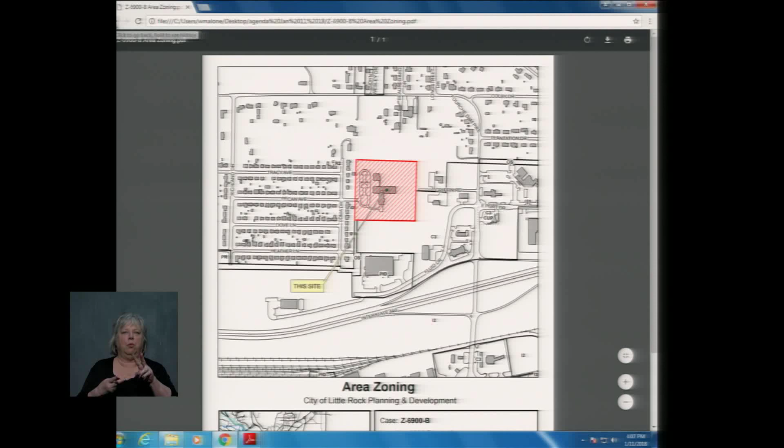The applicant has not responded to comments raised at the November 1st, 2017 Subdivision Committee meeting. Staff recommends deferral of these items to the February 22nd, 2018 public hearing. Item number 6, file number S-1805, Little Rock Tours Subdivision Site Plan Review, located at 3100 Interstate 30.

The applicant submitted a request dated January 8th, 2018, requesting a deferral of this item to the February 22nd public hearing to allow the developers time to meet with the adjoining neighborhood. The deferral request will require a waiver of the Commission's bylaws with regard to the late deferral request. Staff is supportive of the deferral request.

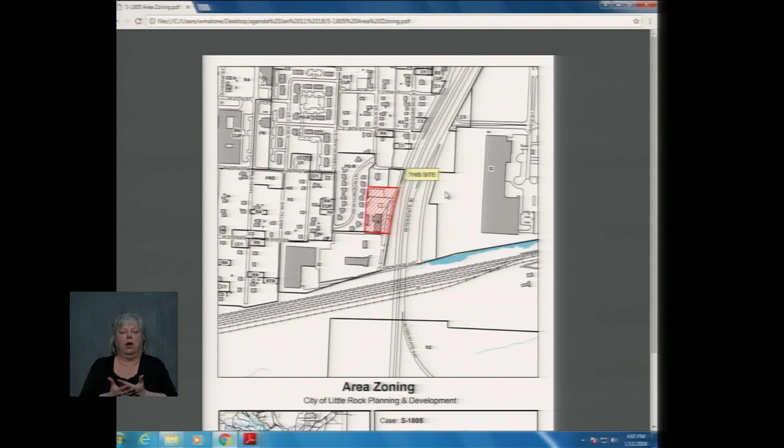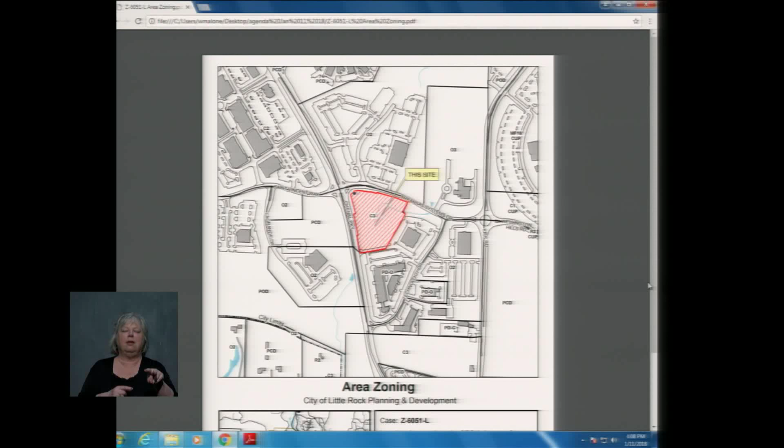Item number 8, file number Z-6051-L, Shops at Chenal, long form PCD, located on the southeast corner of Arkansas Systems Drive and Chenal Parkway. The applicant submitted a request dated January 2nd, 2018, requesting deferral of this item to the February 22nd, 2018 public hearing. Staff is supportive of the deferral request.

Item number 12, file number Z-9284, Sticks Bar and Grill, short form PCD, located at 3910 Asher Avenue. The applicant failed to provide staff with the requested parking and circulation plan and the parking agreements with the adjoining property owners. Staff recommends deferral of this item to the February 22nd, 2018 public hearing.

Item number 13, file number Z-9285, Brown, short form PDC, located at 9203 Hilaro Springs Road. Based on conversations with the applicant concerning the proposed use of the property, staff recommends deferral of this item to the February 22nd, 2018 public hearing.

Items for consent approval. Item number 1, file number S-47-N, Parkway Place Tract D, replat, located at 14100 Parkside Drive. Staff recommends approval of the request, subject to compliance with the comments and conditions as outlined in paragraphs D, E, and F of the agenda staff report.

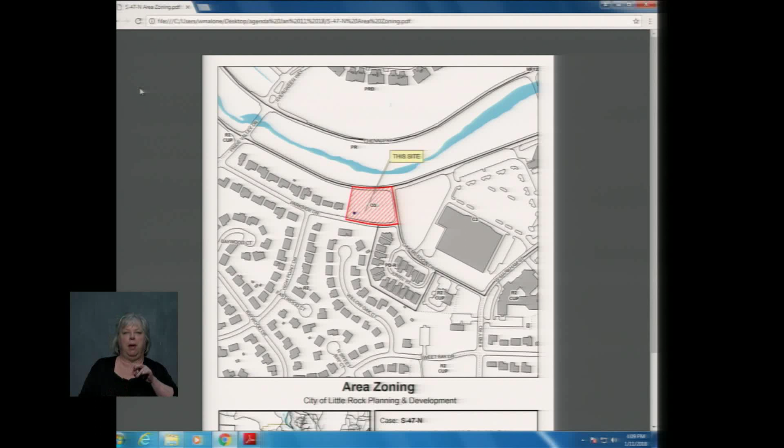Staff recommends approval of the variance request from the master street plan to allow Parkside Drive to be classified as a local street. Item number 2, file number S-224-E, Westover Hills Subdivision replat, lots 77 and 78R, located at 6701 and 6705 Hawthorne Streets. Staff recommends approval of the request, subject to compliance with the comments and conditions as outlined in paragraphs D, E, and F of the agenda staff report.

Staff recommends approval of the variance request to allow reduced side yard setback for lot 78R.

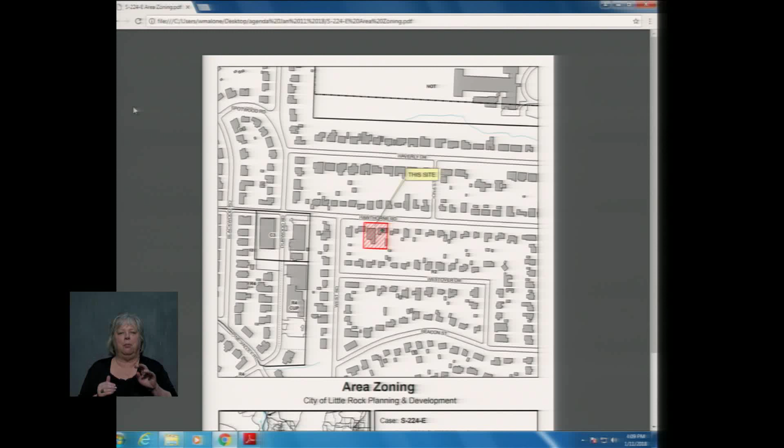Item number 3, file number S-867-R, Chenal Valley Phase 33 preliminary plat, located east of Lamarche Drive and west of Rahling Road, accessed from Lamarche Drive and Chenal Heights Drive.

The applicant has addressed staff's concerns related to sight distance, has redesigned the street to intersect with Masons Boulevard, and has provided staff with a sketch grading and drainage plan. The applicant has also indicated traffic calming measures along Foulstone Drive.

The request includes a variance from section 29-190 to exceed a 3-to-1 maximum slope requirement. The applicant proposes, based upon a geotechnical analysis and report, to fill to a 2-to-1 slope. Based on the information provided, staff is in full support of the applicant's request.

Staff recommends approval of the request, subject to compliance with the comments and conditions as outlined in paragraphs D, E, and F of the agenda staff report.

Staff recommends approval of the variance request to allow reduced front and side yard setbacks. Staff also recommends approval of the variance request from the city's land alteration ordinance to allow grading of future phases and the lots with the extension of the infrastructure, and the variance request from section 29-190.

Item number 4, file number S-867-S, Chenal Valley Phase 32 preliminary plat, located on the east side of Lamarche Drive across from Lamarche Boulevard.

The applicant submitted a sketch grading and drainage plan and a letter certifying the sight distance for the new street at the intersection of Lamarche Drive. The request includes a variance from section 29-190 to exceed the 3-to-1 maximum slope requirements.

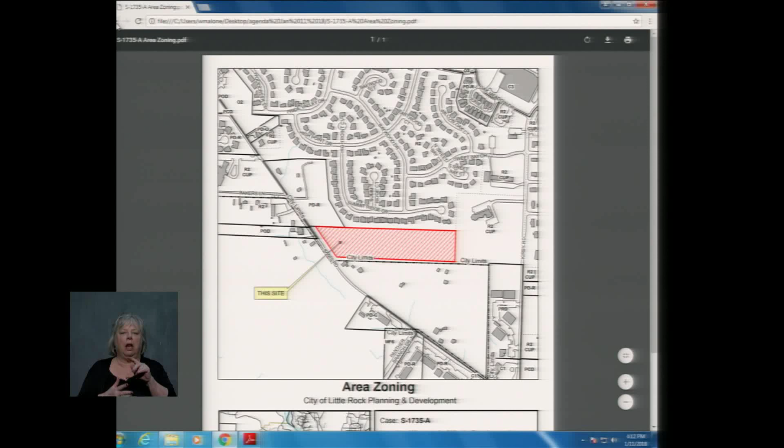A variance from section 31-232 to allow the creation of lots with a lot width less than the 60-foot typical required per the R2 single-family zoning district, and to allow 5-foot side yard setbacks on all lots within the subdivision. Item number 7, file number Z-8741-A, Ace General Contractors, short form PDC, located at 10819 Stagecoach Road.

Item number 7, file number Z-8741-A, Ace General Contractors, short form PDC, located at 10819 Stagecoach Road.

Staff recommends approval of the request to add medical office and general and professional office uses as allowable uses for the site as proposed by the applicant.

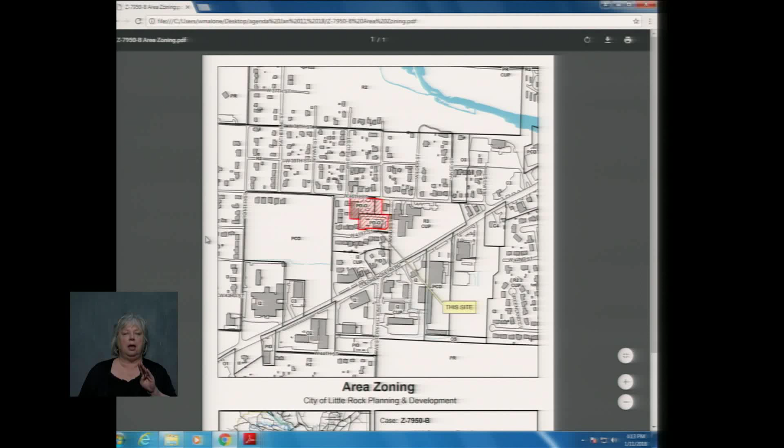Item number 9, file number Z-7950-B, Pollock Realty, revised short form PDO, located at 4016 Stannus Road.

Staff recommends approval of the request, subject to compliance with the comments and conditions as outlined in paragraphs D, E, and F of the agenda staff report.

Staff recommends approval of the variance request from Section 30-43 and 31-210 to allow the drive on West 40th Street nearer the property line than typically allowed. All gate locations will have to be approved by staff.

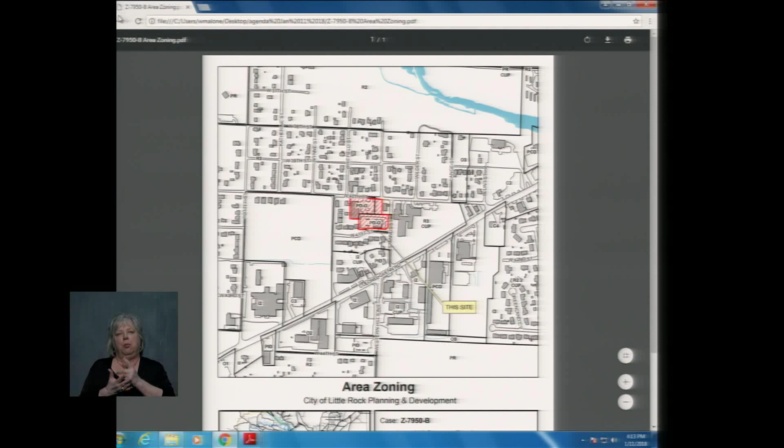Item number 10, file number Z-9078-A, Central Arkansas Urgent Care Short Form PID revocation, located in the 7400 block of Lindsay Road.

Staff recommends the current PID zoning classification be revoked and the previously held I-2 Light Industrial Zoning District be restored.

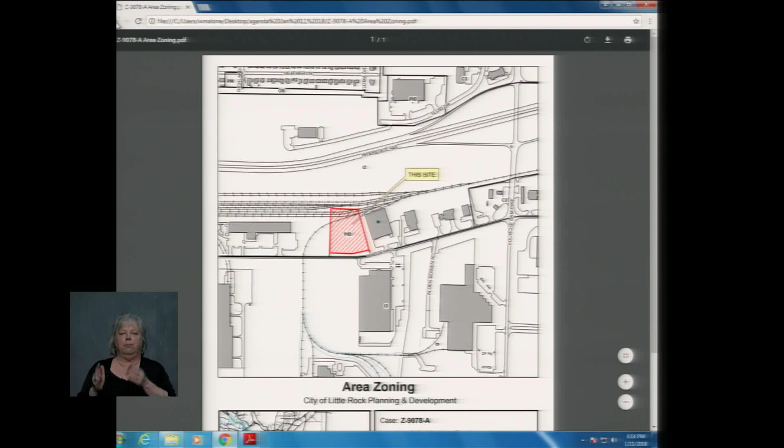Item number 11, file number Z-8751-A, Mosaic Church of Little Rock, revised long form PCD, located at 6221 Colonel Glen Road.

Staff recommends approval of the request, subject to compliance with the comments and conditions as outlined in paragraphs D, E, and F of the agenda staff report.

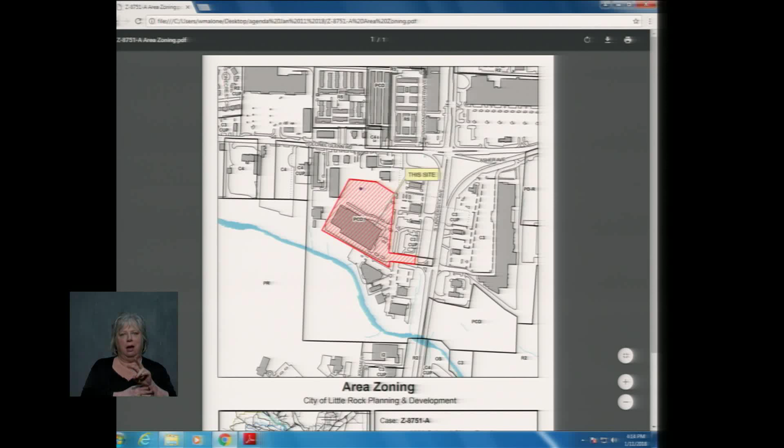Item number 15, file number Z-9287, AEDD short form PDC, located at 105 East Roosevelt Road.

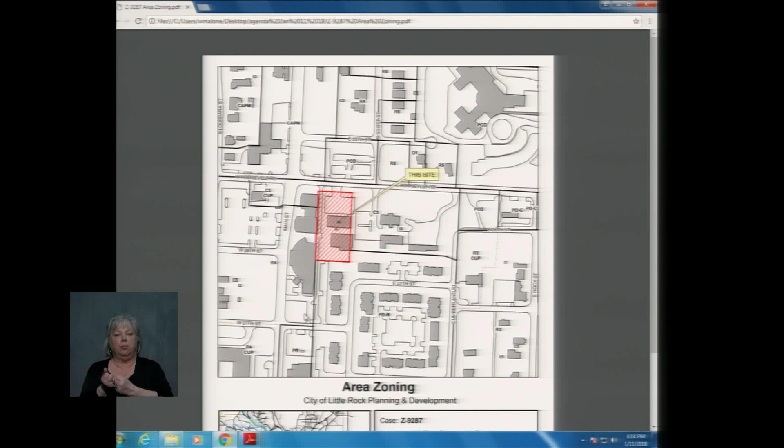Staff recommends approval of the request, subject to compliance with the comments and conditions as outlined in paragraphs D, E, and F of the agenda staff report.

Item number 16, file number Z-4451-F, 71 Hunters Green Circle, revised short form PDR, located at 71 Hunters Green Circle.

Staff recommends approval of the request to allow the placement of the proposed sunroom within the rear yard setback. And that concludes the consent agenda.

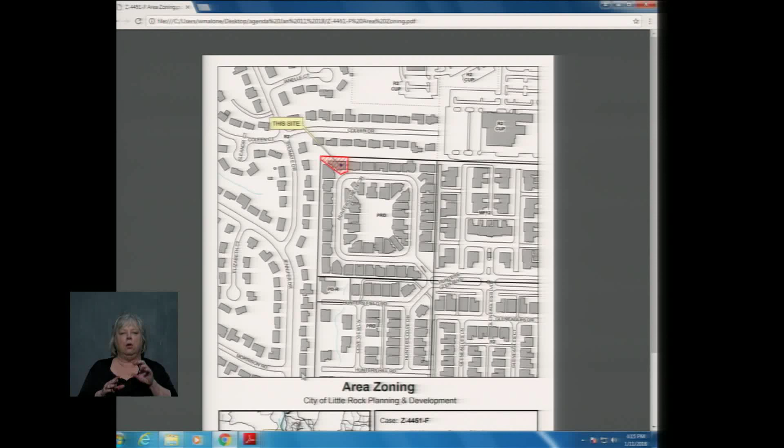Thank you, Donna. Do we have any motions, please? First, the first one will be bylaw waiver, yes.

Mr. Chairman, I make a motion that we adopt a bylaw waiver for item 6S-1805 Little Rock Tours. There's a motion for waiving the bylaws to defer that item. Do I hear a second, please? I'll second. We have a motion to defer that item to February 26th. Those in favor of the bylaw waiver, raise your hand.

Those opposed? Okay, do I hear a motion for the consent agenda, please? Mr. Chairman, I move that we approve the consent agenda, including all staff comments and conditions therein. We had a motion for the consent agenda to be approved. Do I hear a second? Second. We have a motion and a second for the consent agenda.

Those approve the consent agenda, raise your hand, please. Those opposed? If you were applicant and your item was read by Donna, that was on the consent agenda, that means you're excused. Your item was approved to move forward.

While they're transitioning out, I want to remind the folks here for item C, which is the one on Bowman, there's a limit to 20 minutes for each side, though I don't think this will be an issue. So those in opposition to that item, if you have a speaker you want to speak first or speak most, feel free to offer him or her up. I only have 3 cards for item C, so I think 20 minutes will be adequate for that.

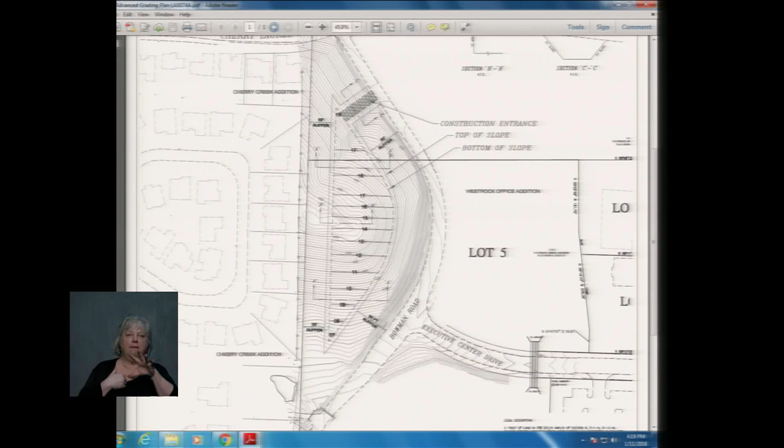Excuse me, I've lost my place. The revised plan shows an 80-foot undisturbed buffer to be maintained adjacent to Bowman Road, except for construction access. It also shows an undisturbed buffer to be maintained against the subdivision to the west of 50 feet, except for a construction entrance to haul dirt.

The plan up there represents where the contours are in the middle of that bow-shaped donut hole where dirt would be removed, and construction access would be to the north through the hatched area. They would maintain some of the trees and some of the earthwork along Bowman and along that subdivision. This is a temporary grading plan, in that someday somebody is going to relocate Bowman Road, but this is how it will temporarily look in the interim.

And that will also create some terraces on the interior of that excavation. Because those terraces are more than 10 feet tall between a 10-foot bench, they're proposed at 15 foot, that creates the second variance that you see in your write-up.

With staff's recommendation for approval, we have a number of conditions associated with it: that these buffers be maintained as required in the ordinance, that they restore the site with suitable vegetation such as hydroseeding, that a geotechnical analysis be done to make sure what they're doing is stable and won't fall in or cause any problems to anybody else in the area, and that it'll be stable for a long time afterward. There are other conditions associated with the issuance of that excavation permit that are outlined in the packet and in the ordinance. And with that, I think I've introduced that one well enough.

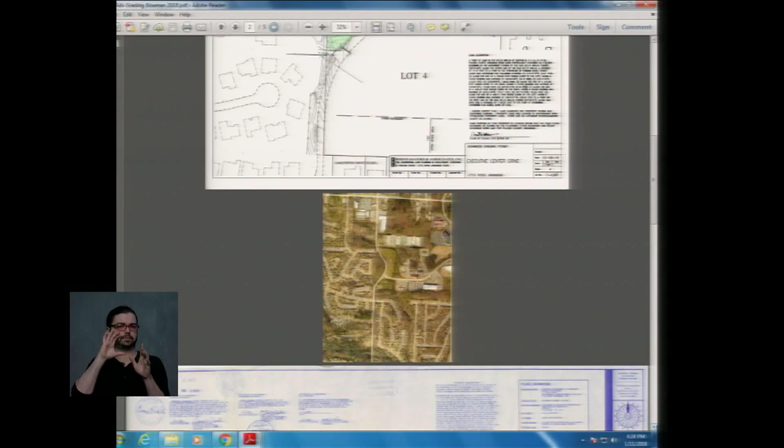And Walter, do you have that next one that comes up? This just helps you get a general feel for the area, and you can go on to the blueprint right below that. This is actually the preliminary plat that was approved in 1996, and it shows—it's a little hard to tell after 20 years—it does show the realignment of Bowman Road. Bowman Road actually moves westward about 150 feet from where it is right now. That gets rid of these two reverse curves on this minor arterial.

Executive Center Drive would have to be relocated to tie into the new alignment. And Mike is correct that the owner of this property is obligated to do this work if they want to sell any of the properties on Bowman.

We're not asking to have any relief from this preliminary plat or to have anything differently. We are asking that we use this opportunity of the various construction projects in the area that do need the material to take the material from this location, which will reduce the cost of moving Bowman Road at some point

Removing this material will decrease the ultimate cost of moving Bowman Road at some point in time in the future. But to say that it's going to accelerate the development of it, this area of Bowman will probably not develop until Bowman is developed from Kanis down to this location.

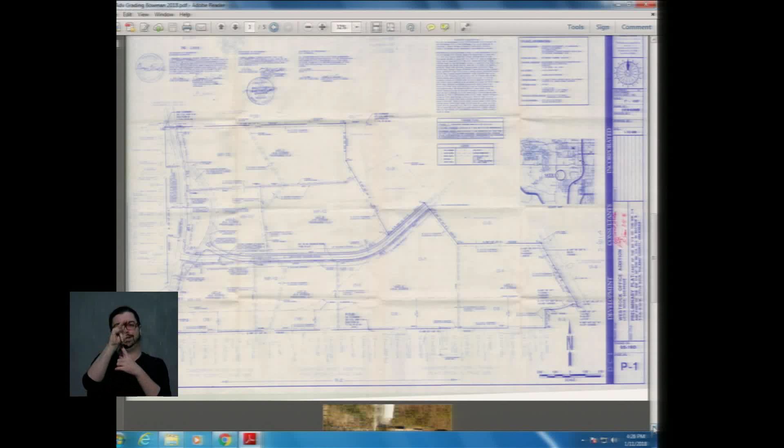But we've been working with the city to come up with a plan so that we could get their support, and I'd be happy to answer any questions that might come up or arise.

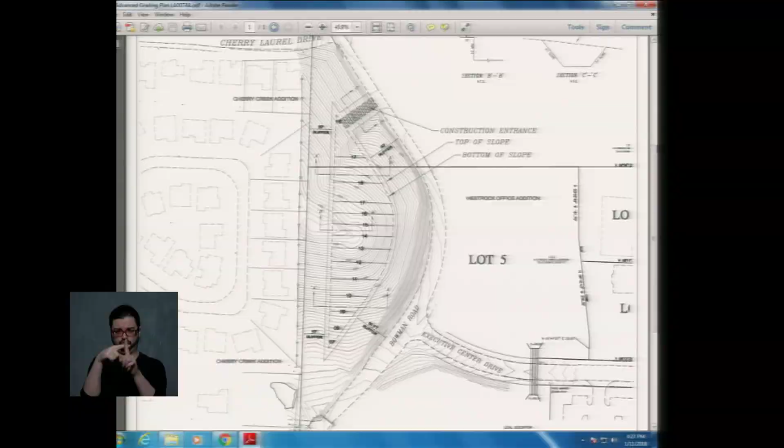Don Jack. Yeah, my name's Don Jack, and I live at 1920 South Bowman. And if you're looking at that chart right there, I'm kind of at the very southern tip of the wedge as it comes down to a point.

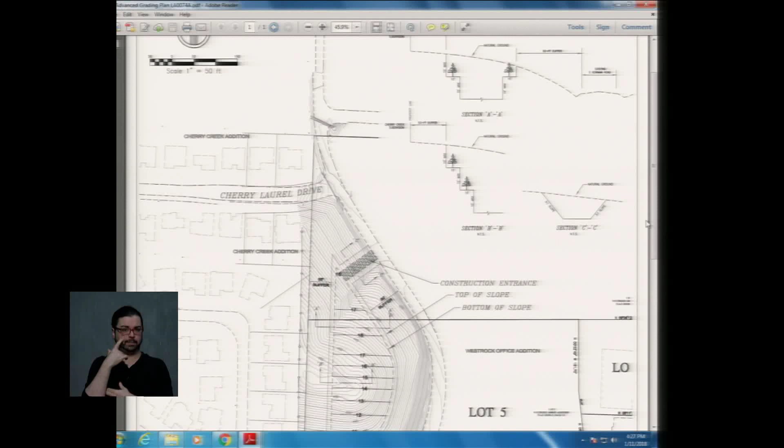This letter is written. What I wanted to do is read an email that was sent by Casey Shepard. She's also a fellow neighbor of mine, and she lives at the northern tip of that shape, and she wasn't able to come here today due to work. She's also an environmental engineer for an electric utility company, but she had also worked with the Arkansas Department of Environmental Quality at one point in time. This email was sent earlier today about 1 o'clock.

You'd say what? Oh, okay. Okay. Anyways, it's a short email, and let me read it.

It says: Hello again. It's come to my attention that an updated site map was submitted on Tuesday, mere 2 days before the public hearing. As for the decision to be deferred until the next meeting, since it is estimated that the clearing and grading would take up to a year, yet there is no imminent construction plan. Therefore, there should not be a need to rush the decision without the nearby property owners' review and input.

It appears the buffer issue is addressed on this update. However, I'm still very much concerned. This and previous site maps mentioned part of the project is in the 100-year floodplain, and grading this area and removing vegetation will lead to worsening issues with flooding that we already are burdened with in the future. Again, erosion will occur as vegetation would be hard to establish in the rocky shale soil part.

The request is a rezoning of the site from O3 General Office District and R2 Single Family Zoning District to PCD, Planned Commercial Development, to allow the placement of a food truck in the front of the business at this location and to use the existing structure for commercial or retail uses.

The food truck is proposed in the front yard of the existing structure and placed on a paved parking pad. The applicant previously requested the food truck be allowed to remain on the site during non-operational hours, but has since amended the request, and the food truck will leave the site during non-operational hours.

The existing building contains 1,150 square feet of floor area and will be used for commercial uses and services to include moneygrams, phone cards, cosmetics, shoes, and apparel, snacks such as chips and ice cream, and bulk food, canned food. The request includes the allowance of C1 neighborhood commercial district uses as allowable uses for the existing structure.

The site plan indicates the placement of a paved parking area behind the building containing 5 parking spaces. A dumpster is no longer proposed to serve the site, and the applicant has indicated the trash will be removed from the site daily. The applicant indicates the days and hours of operation are 10 a.m.

to 7 p.m., 7 days a week, with the exception of Friday evenings when the applicant will stay open till 9. The applicant previously requested additional hours but has since amended their hours to coincide with what staff was recommending.

The plan includes the placement of a 6-foot screening fence around the proposed parking area. Also, the placement of a 4-foot fence within the front yard area to block the sidewalk, or at the back of the sidewalk, to direct foot traffic along the sidewalk and not cut across the front lawn.

The site plan has been revised to indicate the placement of a 9-foot landscape strip along the eastern perimeter of the paved parking area and along the northern perimeter. The indicated landscape in these areas complies with both the landscape ordinance and the buffer ordinance requirements.

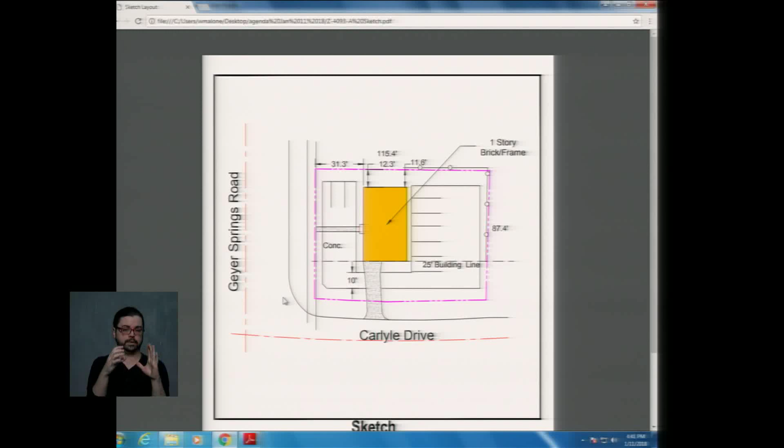Thank you, staff. We have the applicant here. Wish to approach the lectern, please.

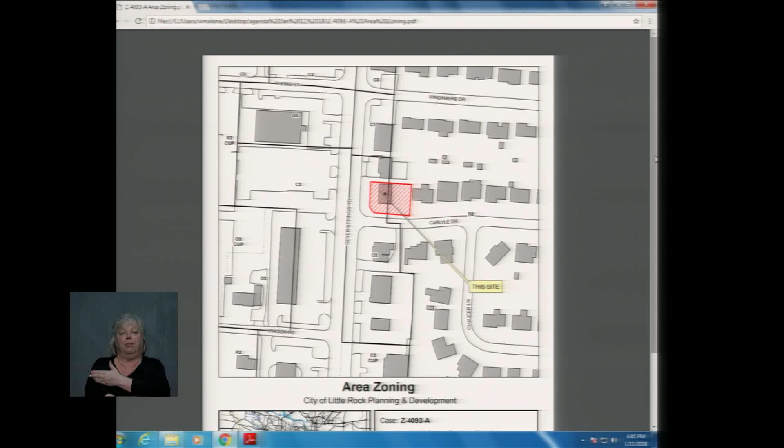A presentation was given thoroughly to the Southwest Ops; however, the members voted not to support it. This letter is asking for denial, and the reasons are: the property is not large enough to handle all that's required of the applicant, parking and landscaping are not sufficient, and the parking would be abutted to a lived-in family home. The requested hours of operation would be disturbing to the neighbors along Carlyle Drive. The driveway spacing would violate city ordinance and, if waived, would present a hazard upon entering and exiting Carlyle at Geyer Springs. The entire front lawn has been covered with gravel, making it unattractive. We respectfully request your recommendation of denial for this application and request the applicant remove the food truck and gravel from the front lawn and replace it with sod. Southwest Little Rock is beginning a revitalization of Geyer Springs and the surrounding area within the coming year with the help of a development consultant group. Our planning strategy will be similar to SOMA in downtown Little Rock. Beautification along the corridor is vital to this revitalization, and this request doesn't fit within the scope. We do support our businesses and the new entrepreneurs in Southwest Little Rock, and the development consultant group will include them in the revitalization plans.

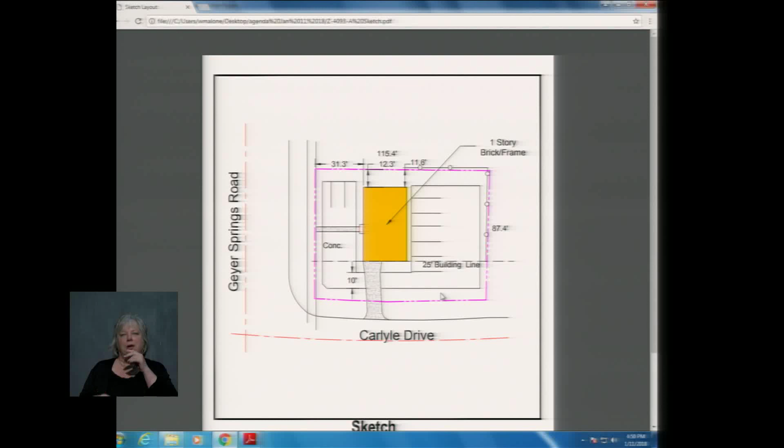Our customers are mainly families. And pretty much, as she stated, the kind of customers that they generate is families. Children come in there, couples come in there. It's just not solidly men coming to visit the place for food. Thank you.

Commissioners, questions, comments? We have a question for you.

Applicant, come up please. I wanted to ask, what all services are you going to provide there? You said food, MoneyGram services, and what additional services? Well, inside the building we have MoneyGram services. We have phone cards, they're also able to pay bills through the MoneyGram services. We have boots, work boots, and kids' boots, like cowboy boots.

And there'll be no seating outside for anyone to sit down and eat? No seating at all. At the moment we have 2 benches, picnic tables, but it's just while they wait for their order. Mainly they don't usually stay there for long times, just waiting for their order to be picked up.

Okay, thank you. Any other commissioners? Commissioner Leahy, this is for the staff. Did the Brooks survey submit a corrected survey? They did go back to Brooks survey and did get a revised site plan and survey.

Mr. Mann, if you were aware of these changes in hours, would it make any difference in how they voted on it at the neighborhood meeting? At the last meeting, the consensus was still the same as it was the first time we met addressing the issue. We were not aware that they had made changes to their design before I came to the meeting today. There was no communication to Southwest Ops Group at all about this.

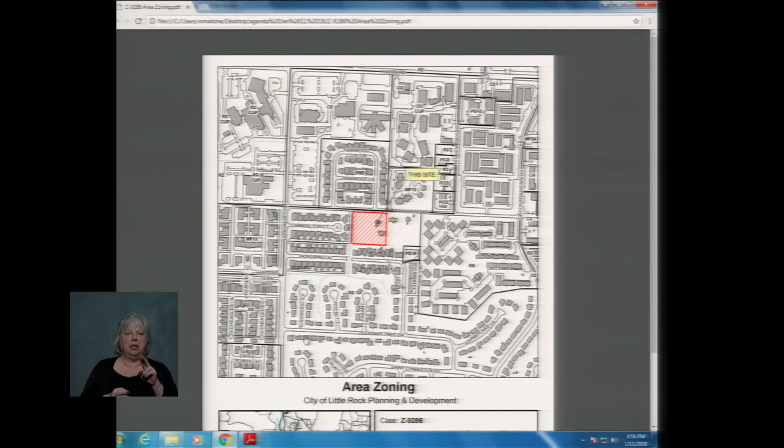The development is proposed with 17 lots of owner-occupied attached housing. The site plan indicates 8 buildings of duplex-style homes and 1 building of a single residence. The units are proposed as 1.5 to 2-story buildings with a maximum building height of 35 feet with attached garages. The buildings will be constructed in phases as they are sold.

The subdivision is proposed with private streets. The street is proposed as a loop street extending south from Rainwood Road. The development will have a call keypad entrance located along the western intersection with Rainwood Road. The eastern location will have a gate remote exit-only gate.

The development is proposed with 24-foot wide streets with parking restricted to one side. The development will have a combination of metal and brick fencing along Rainwood. The plan indicates the placement of a 6 to 8 foot decorative metal fence with 8 to 10 foot brick columns and a 6 to 8 foot brick fence at the entry drives to the subdivision.

The remainder of the subdivision will have a maximum fence height of 8 feet constructed of wood. The subdivision sign will be incorporated into the brick fence. The sign area will not exceed 24 square feet.

The request does include a variance from the land alteration ordinance to allow grading of the lots with the installation of the basic infrastructure. The applicant has indicated that to balance the site, advanced grading is necessary. Staff is supportive of the request.

The applicant is proposing a single-family attached subdivision developed with private streets. Within this general area there is a mixture of uses, including single-family, multifamily, and condominium housing. Staff feels the development of the subdivision as proposed is appropriate, and staff does recommend approval of the request, subject to compliance with the comments and conditions outlined in paragraphs D, E, and F of the agenda staff report.

RPM Group. Also with us is Ernie Peters, if there's any questions about traffic. We'd like to reserve our time in case there are any questions. Thank you very much.

Thank you. Sherry, would you like to approach the lectern? I'm sorry, I can't read your last name very well. Clawwitter. Sherry Clawwitter, okay.

Thank you for allowing me the opportunity to speak. I think I'm being run out of my neighborhood, and I'll give you my information. I have not been informed of this layout. I have not received any information of it, other than from the son of the original owner of the property, telling me what they thought they were going to be able to do.

I own 2.5 acres adjoining their property. I'm at 12023 Rainwood and have been there since I was born, except for 10 years when my husband and I went into the service.

Right now, the traffic on Rainwood Road is horrible. There is a bus that goes up and down that street to the school up on Napa Valley, or Hinson Road. There are condos across the street from me. There are 1, 2, 3 housing additions up in front and to the left of me. The traffic is horrendous. I was able recently to get a speed limit sign put at the top and bottom of Rainwood Road because the cars were going 40 and 50 miles an hour up and down the street.

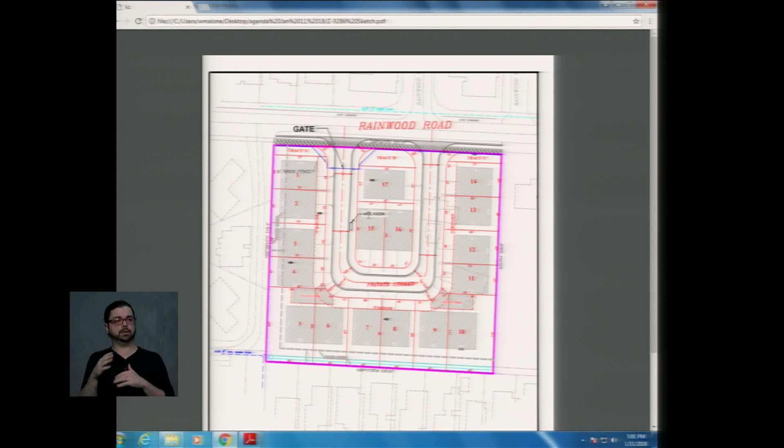We will be widening Rainwood Road, to a half of Collector Street, and building a sidewalk. Our work in no way will force you to do any work on the adjacent property or anything. It's just the boundary street improvements in front of us.

If that were the case, I would be the only resident on the street to not have a sidewalk or a street widened. That's correct. The property she owns is the only undeveloped segment then along Rainwood Road from Green Mountain over to Napa Valley.

Ernie Peters did do a quick traffic analysis for us, and Ernie can hit that really quickly if I ask him to, if you're still there, Ernie. I also saw a note that the city is going to install 2 more speed limit signs. Is that correct, Mike? Yeah, they've already installed, and they're going to install 2 more speed limit signs on Rainwood.

Thank you. Chairman Berry, I'm Ernie Peters of Peters and Associates Engineers. We were asked by White Daters to conduct a traffic and speed study on Rainwood at this location. We did that just last week, and in measuring both eastbound and westbound vehicles traveling on this segment of Rainwood, the total volume combined over a 24-hour period is just over 2,100 vehicles per day.

This is a collector street, which would be expected to have a service volume of less than 5,000 vehicles per day, which it does. We measured the speed both eastbound and westbound. The combined average speed was 34 miles per hour.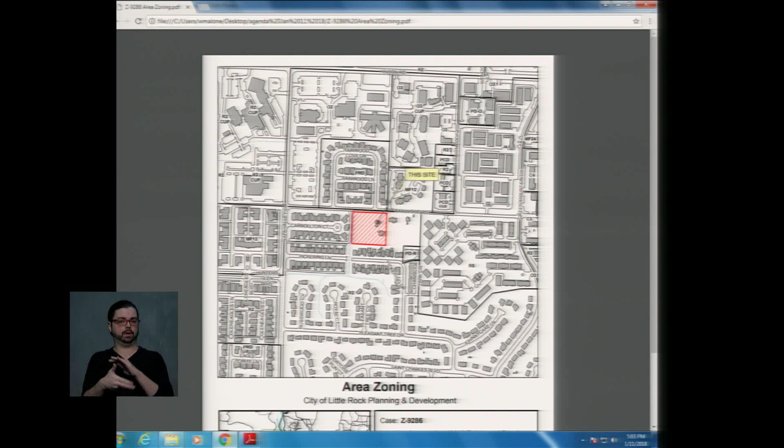We found that the AM peak period of traffic was 7 to 8 a.m. with 196 vehicles, and the PM peak hour was 3 to 4 p.m. with 272 vehicles. So the volumes are not excessive considering the classification. The speed is slightly above the posted speed of 30 miles per hour, averaging 34 for both directions. If you have any questions, I'd be glad to answer them.

Thank you, Mr. Peters. Commissioners, questions, comments? No? Okay, Mr. Chairman, I move for the approval of this item 14Z 9286, and all staff comments and conditions therein.

All right, we have a motion for this application as written with staff recommendations. Do I hear a second? I'll second. Okay, we have a motion that's been seconded. Those who approve this application, raise your hand. And those opposed? Okay, I've got a count there. 11. All right, that finishes out the regular agenda.